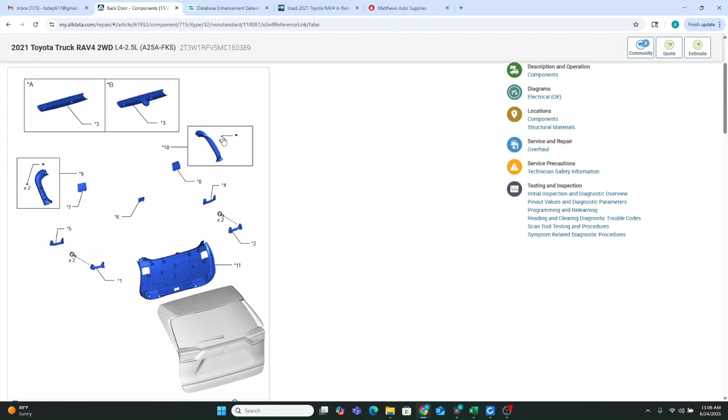So if I'm looking for one-time use parts, I can be in Alldata, load up my Toyota RAV4, and go into body and frame, doors and trunks, get down to that liftgate section. So for Toyota, if I'm looking for one-time use parts, that's generally going to be in the components section here. So we can go through the back door components, and this little black dot means non-reusable part for Toyota. So there's a clip here on the interior trim part that's non-reusable.

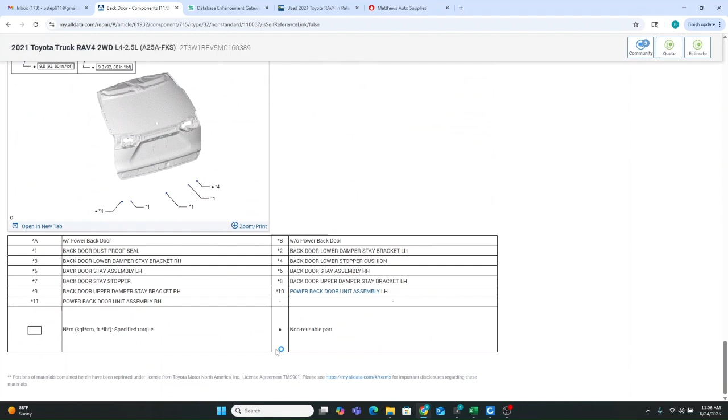And it looks like there's also a one-time use bolt here with this lift cylinder, non-reusable, and these cushions and bumpers are also non-reusable. There's a couple other components to the liftgate that aren't listed here, so we're going to have to go back to the glass. Let's find glass,

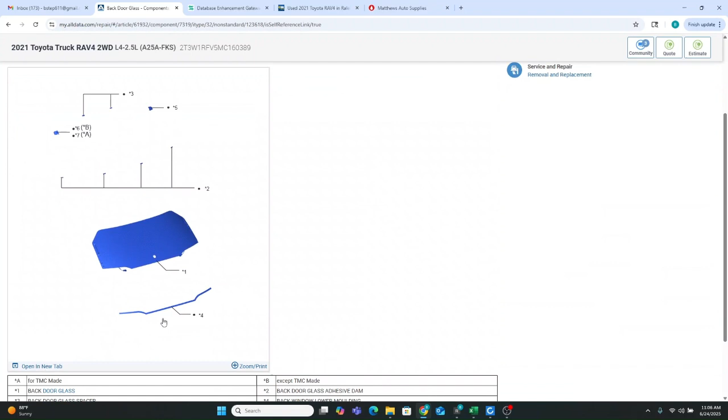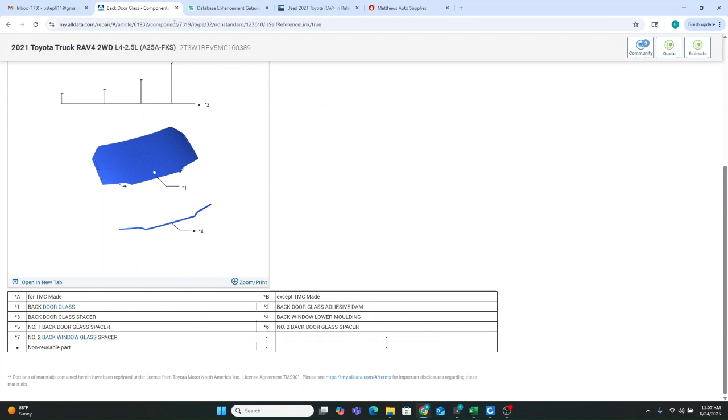liftgate glass, components. And here we got some more one-time use parts, one-time use reveal, the lower molding. Number 4 is one-time use. Number 2 would be the dam, the adhesive dams. And number 3, 5, 6, and 7 are going to be the spacers, depending on if it's a TMC or not a TMC. And then the other thing I want to take a quick look at is on the spoiler.

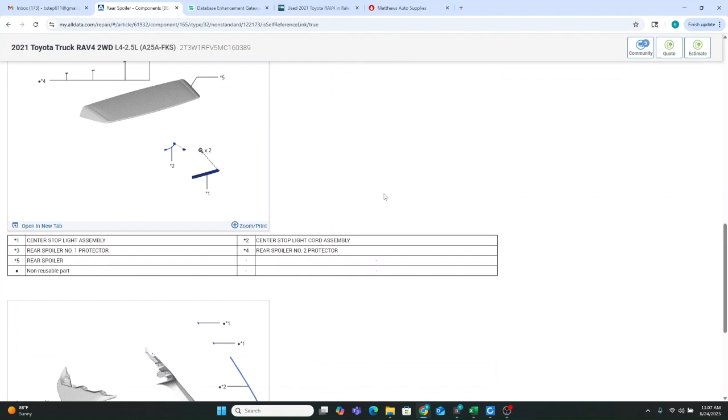So let's get over to the spoiler. Look at the components for that. And again, there's those interior trim parts popping up. But here on the spoiler, number 4, number 3, they're designated as one-time use, protector, protector. 1 and 2 are also one-time use, more protectors here.

So if I'm in the database, I didn't mention the cushion was one-time use. That's labeled correctly here. The bumper was also one-time use. That's listed correctly there. In the glass, however, this first spacer is listed as one-time use. This spacer is not designated left and right. Number 2, the dam, that is not designated as one-time use as it should be, and this reveal molding, so that'll have to get updated.

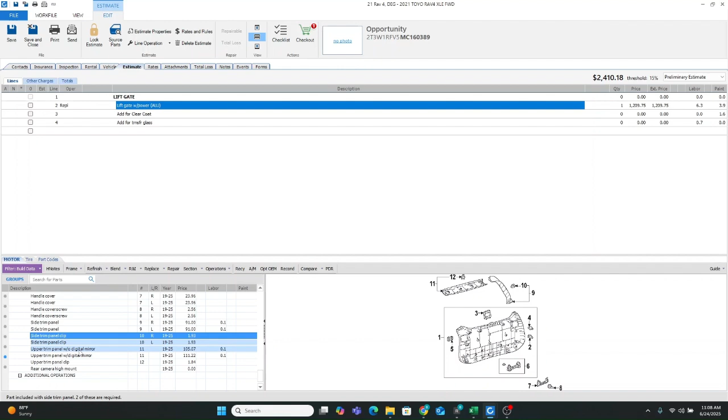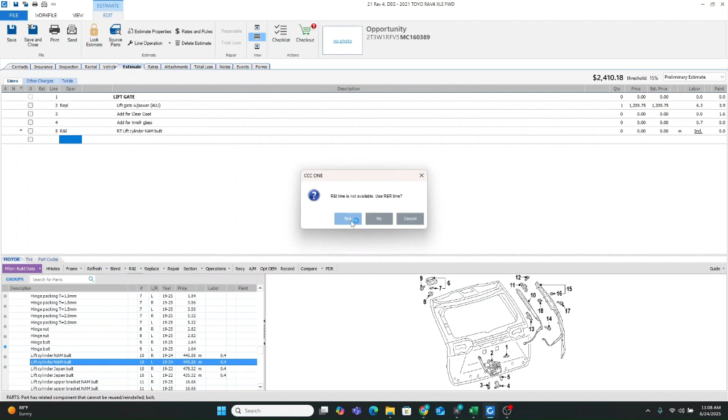The spoiler itself, those protectors should have been listed as one-time use. And number 10, this clip should also be one-time use, and it's not listed here. Something I had also noticed on the liftgate was this lift cylinder. It does have the bolt listed as one-time use, but when I R&I this lift cylinder, yes, that's coming up included. This one's also coming up included.

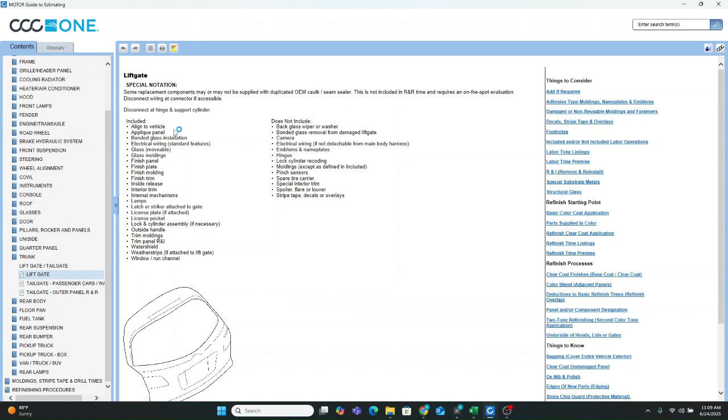But if I was to look at my guide to estimating on a liftgate, it tells me what's included or not included, but up here in the special notation, here we go: disconnect wiring at connector if accessible, disconnect at hinge and support cylinder. So the R&I of the support cylinder should not be included in the liftgate. However, it is being included. So we'll work on getting that fixed as well.

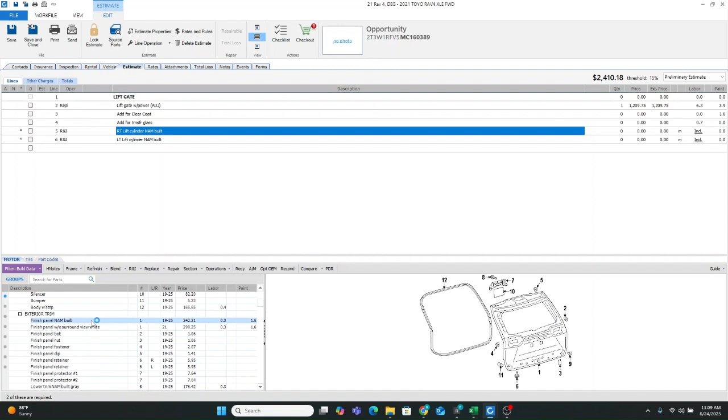So let's run this back here. We need to get this outer spacer listed as one-time use. This spacer, this dam, this reveal molding. On the spoiler, it was this protector, this protector, this protector. Should all be one-time use.

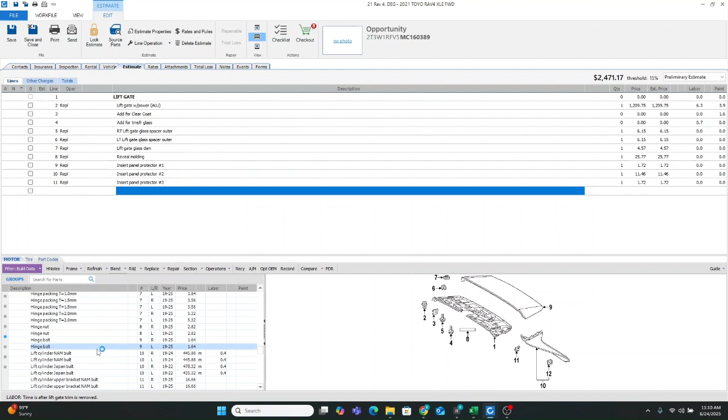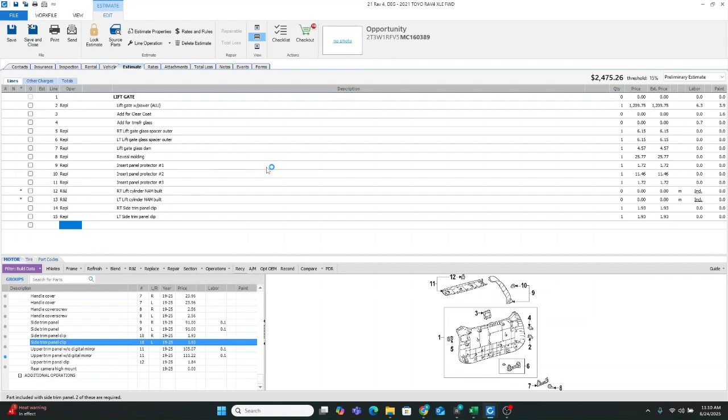Let's move these down so they're where I want them to be in order. This is going to be an R&I. We're going to work on getting that changed over to not included, because in the procedure for the liftgate replacement, it does call out to R&I both of these hydraulic cylinders. And down here, this number 10 should also be listed as one-time use. Okay, perfect. So let's work on gathering a couple screenshots so we can send that up to the DEG as well.

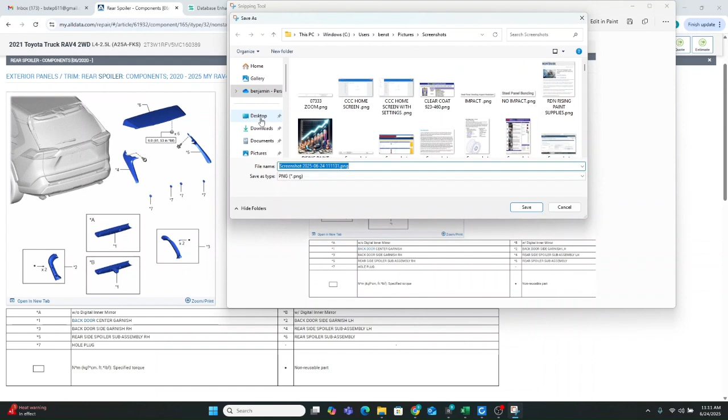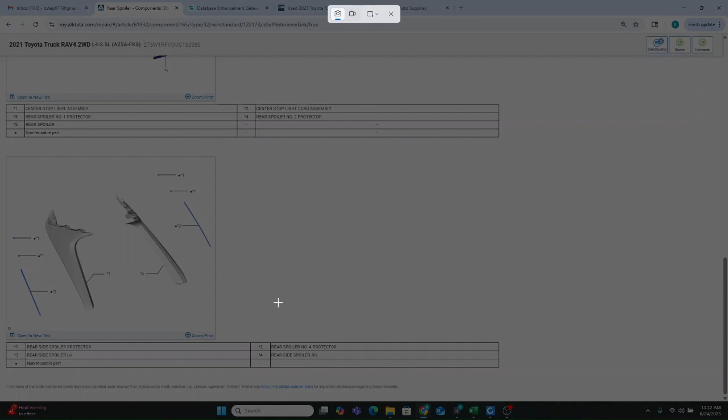So I'm in here for my spoiler. This will be for the back glass. Just make this a little easier to see and read. Grab a screenshot of this, send up to DEG, make it a little easier for everybody to follow along. Make a new folder, 24. Spoiler protectors, show them the side spoilers as well.

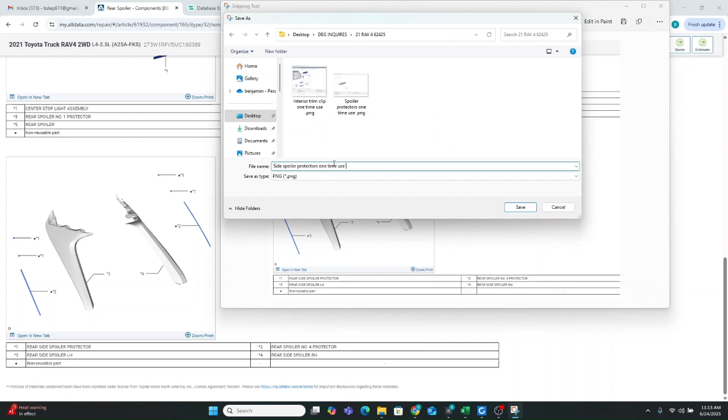All right, we got that. Let's go back to that liftgate glass. Okay, show them that these are one-time use.

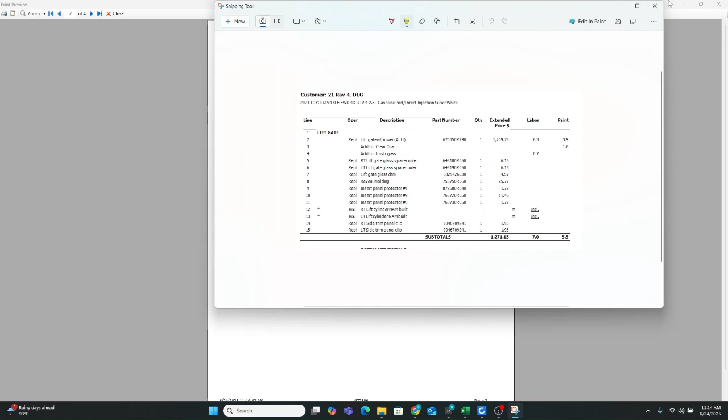All right, and let's head over to the DEG and let's open an inquiry. Put my name in here. I'm a frequent flyer at the DEG. Drop the VIN number here. Looking at a '21 Toyota RAV4, and this is an SUV. Always on CCC, says missing information, and we're on the liftgate.

Let's see, issue summaries. One-time use clips on the interior trim of liftgate, liftgate dams and reveal, protectors. The cylinder R&I is being included, but the guide to estimating has the time only to disconnect. There's no footnote that says it should be included.